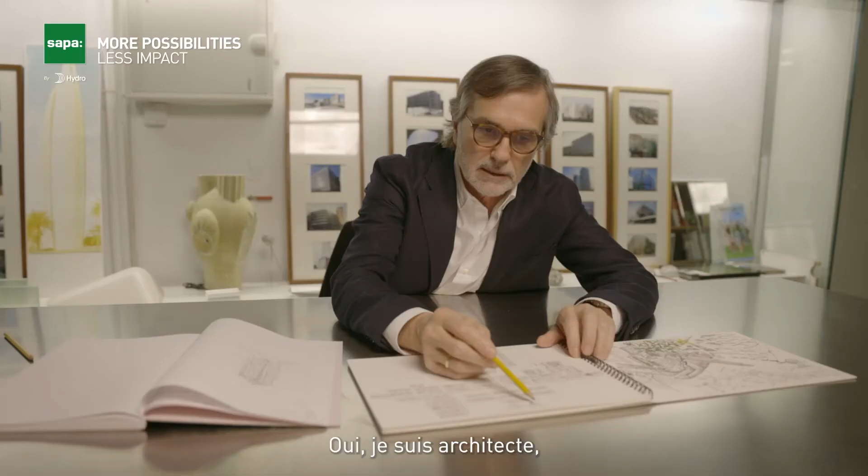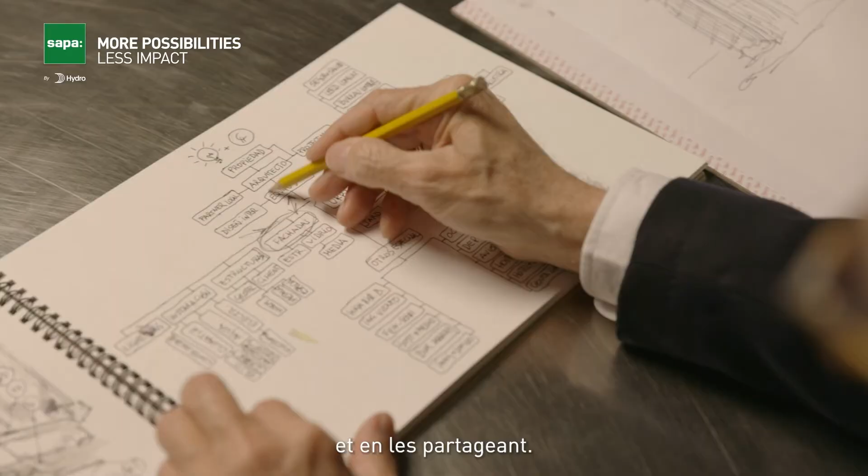First of all, I would like to introduce myself with a simple sentence. Yes, I'm an architect, but an architect with a special profile, because my team and I have developed more than 180 buildings over the last 30 years, making credible the ideas of others, sharing them by teaching in different universities, and especially through drawing.

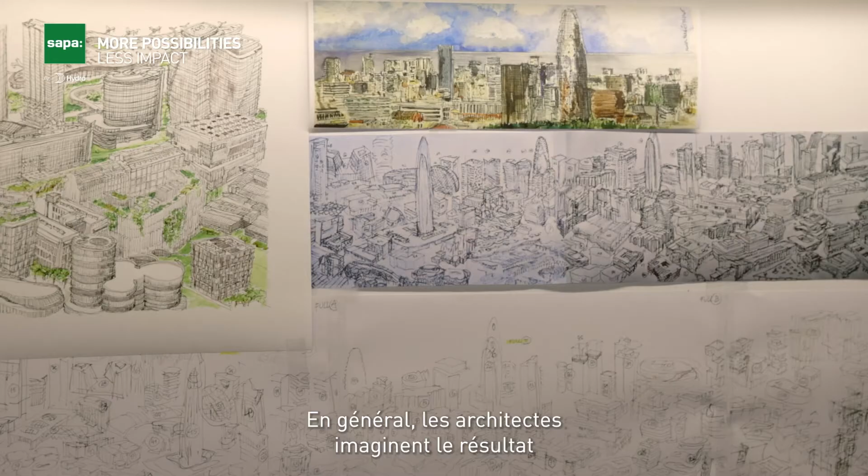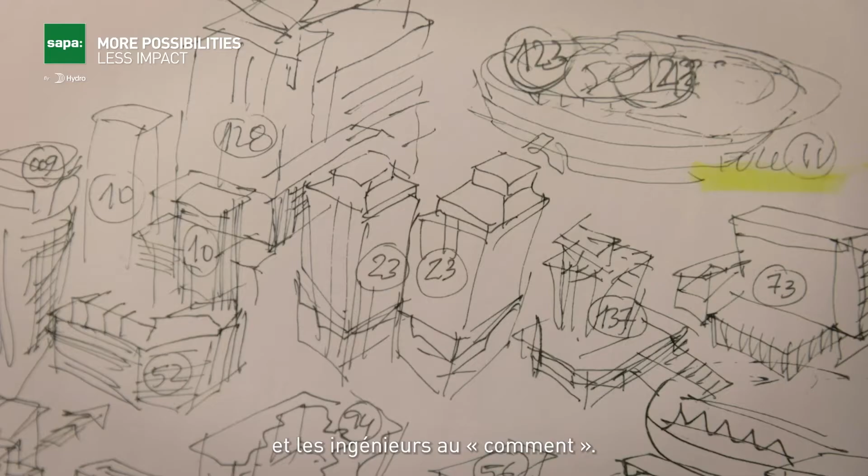We have a small and very dynamic office based in Barcelona, from where we offer facade consultancy for the best architects around the world, including Pritzker Prize winners. Usually, architects imagine the result and engineers create the process - or put another way, architects think what, and engineers know how. So we, as facade consultants, move in an equidistant position between both, and our projects are developed with a simple philosophy: technique and form are the same.

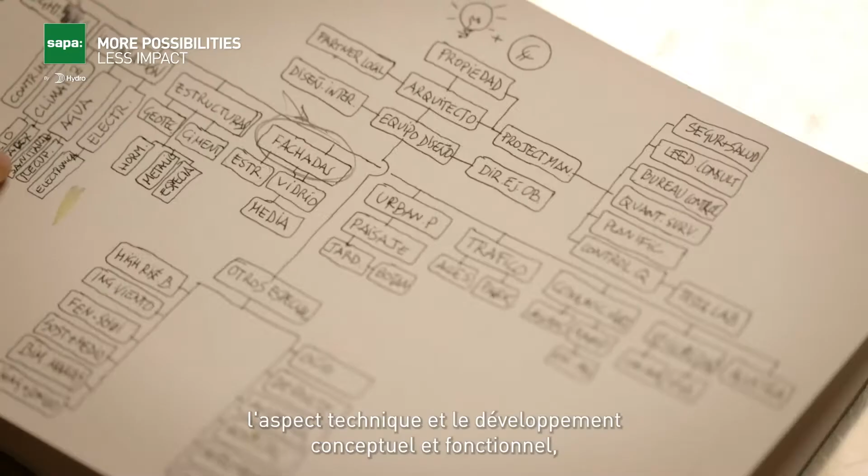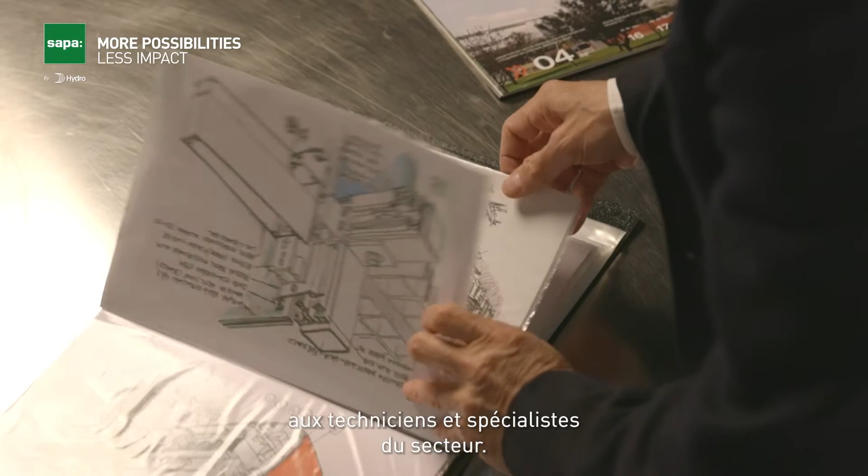Every day, more and more architecture studios focus their work on the level of definition of the facade, the technical aspect, and the conceptual and functional development, leaving the detailing and specific elements of the facade to be delegated to the technical specialists from the industry. So the most common way to face the problem of technology is to claim the support of brands that help us develop the most ambitious projects. Our role as consultant, in addition to this, is to think and advise from a strategic development perspective.

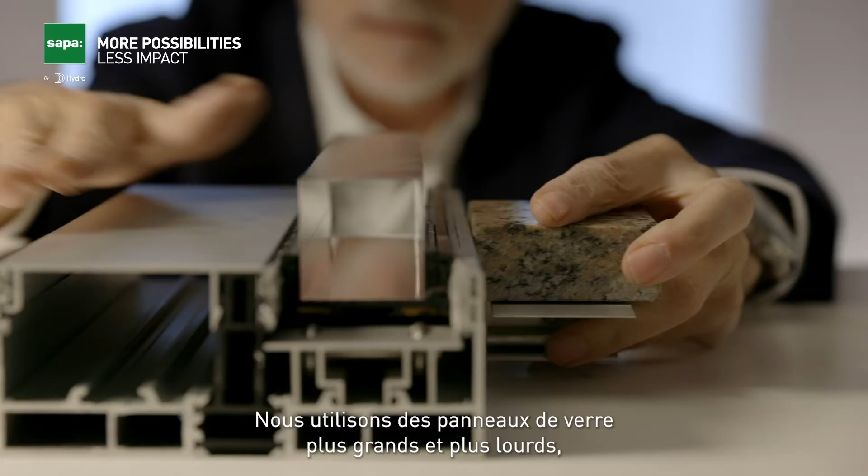The present leads us to consider energy as one of the engines of evolution, and this has been the case for decades. However, this contrasts with the need to work with large formats and glazed surfaces that push the so-called window-wall ratio higher - the energy performance of the facade is in contradiction with the dimension of the transparent areas of the buildings. On the other hand, this need to increase sizes requires larger profile dimensions, engineered for bigger and heavier glass panels by means of an innovative connection and reinforced glazing support.

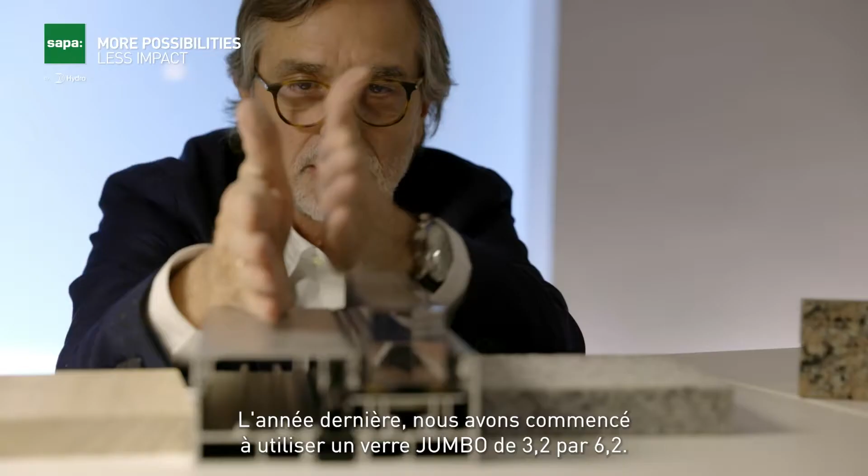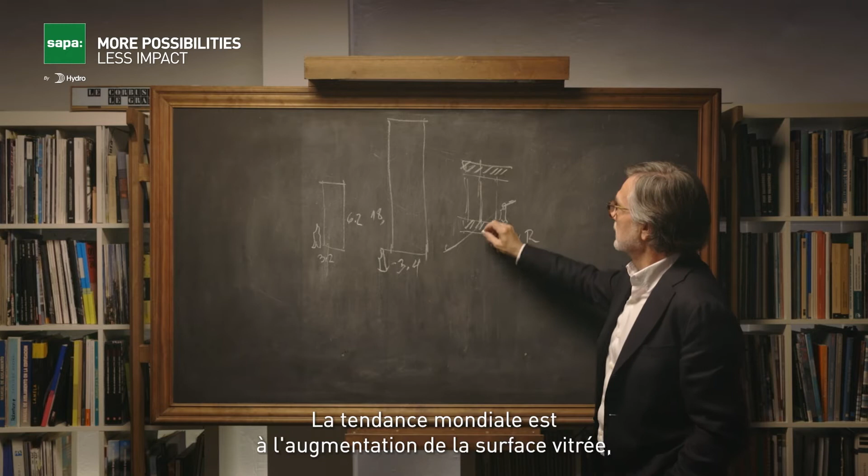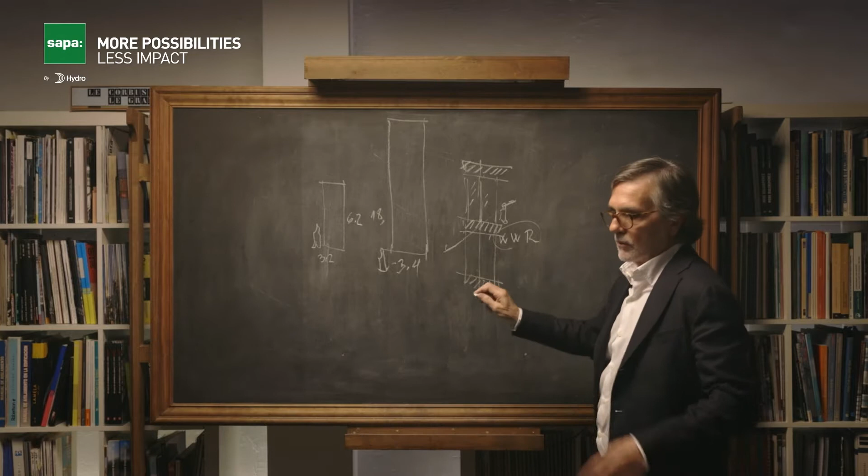Last year, we started with jumbo glass of 3.2 by 6.2 meters. Actually, with different suppliers, we now have glass panels up to 18 meters in height by 3.4 meters wide. So obviously we can use these sizes of glass. The trend of buildings around the world is to increase the glass surface, but balancing with the window-wall ratio, because we need to balance the comfort of users contacting directly, across the glass, with the landscape, the sea, the rest of the city, in order to respect the rules and regulations in terms of energy savings.

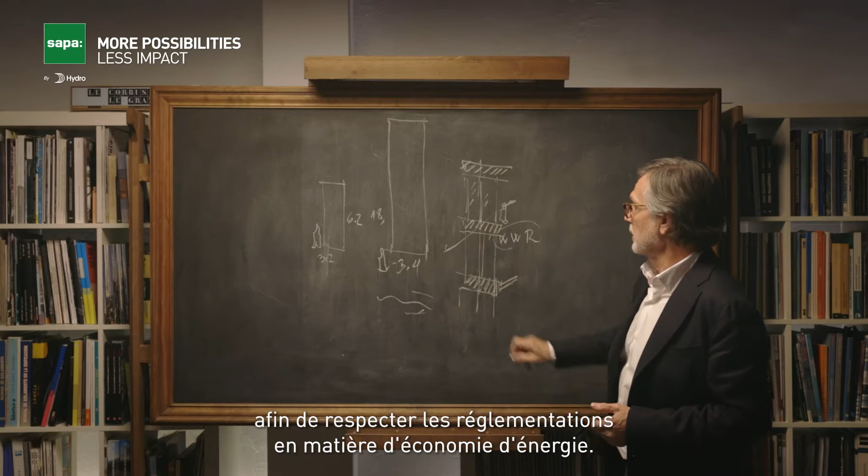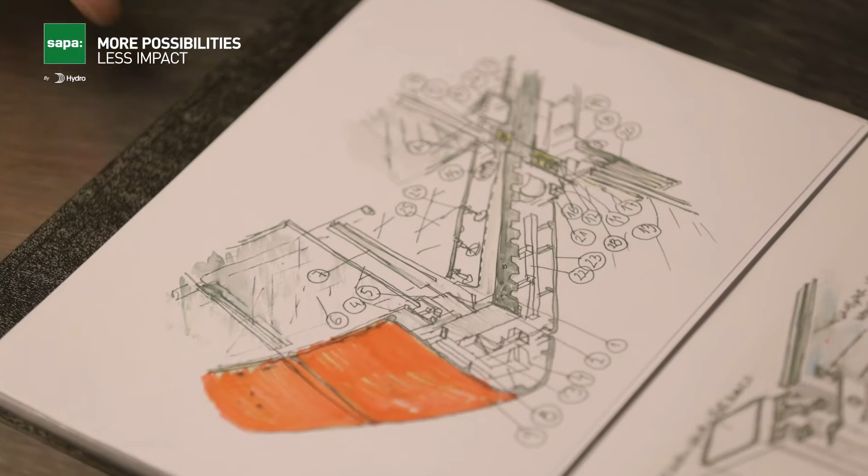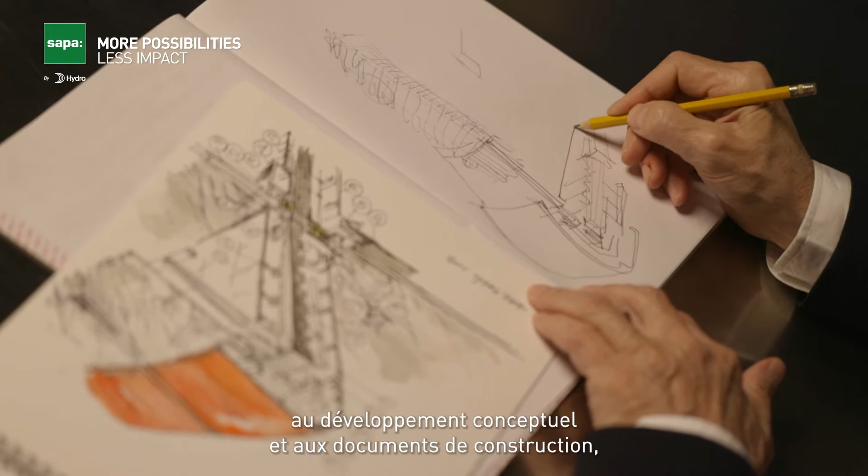The only way that I can explain my experience, my thought, my feeling about the technical decisions and technical elements is drawing. My brain is connected with my hand directly. When we are creating, we have to pass from the concept and schematic design development to the construction documents, trying to be proactive with the architects - normally our clients - in order to achieve maximal fidelity to the original idea.

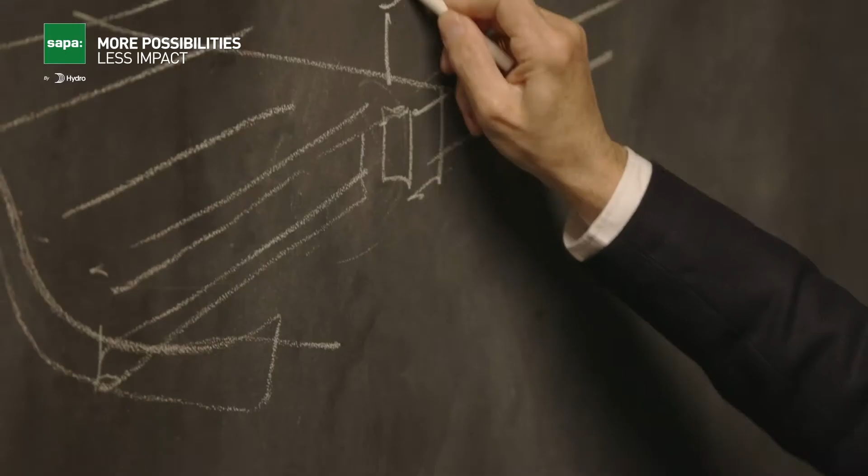For example, a building under construction in Barcelona, named Diagonal Zero, is a multi-story building - I think 27 levels - with a special balcony. This is the original slab, because it's a huge modification of the building. This is the slab, this is the beam that we have to support, this is the level of the interior floor, this is the exterior floor, and we have a shape like this.

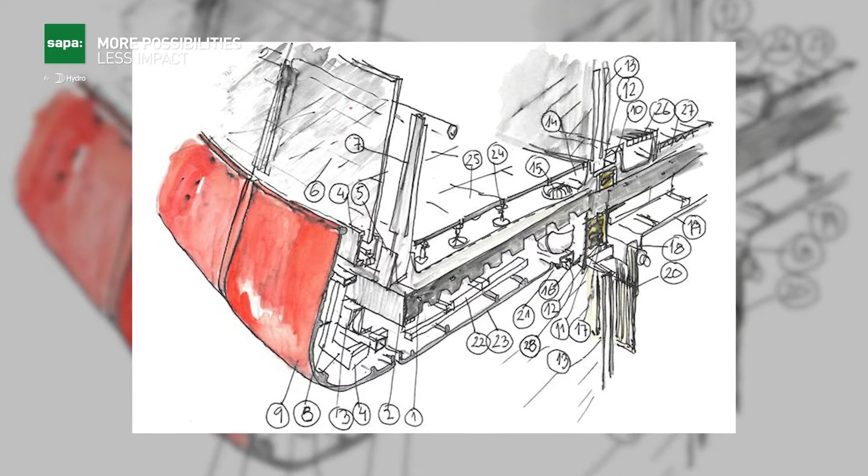This is a balcony, this is a terrace. The building is something like this. It's more or less 110 meters, and all these balconies are here. And here, in the lateral facade, we have a typical curtain wall.

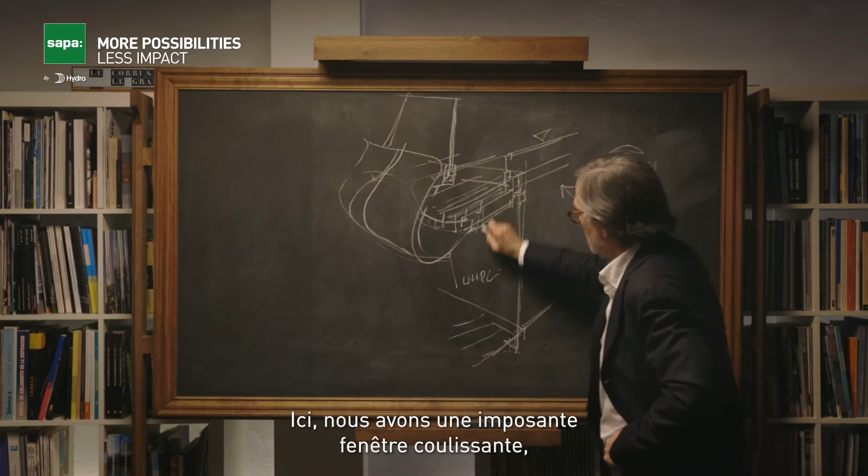It's a profile typical with spandrel and glass and windows, etc. The pass from here to here is very important to understand what happened. What is the slab? What is the structure? What is the weather line? In this case, with a sliding corridor, a sliding window, a huge, maybe 2.50 meter height. We'd like to show this in color, but I think it's clear in order to understand what happened when we have to develop from the concept to the detail.

The second case I'd like to share with you is a commercial and residential building in Ibiza, named Isla Blanca. The author is l'agence Moatti-Rivière de Paris. The project is led by Alain Moatti, and the local partner is Josep Ferrer Llaneras.

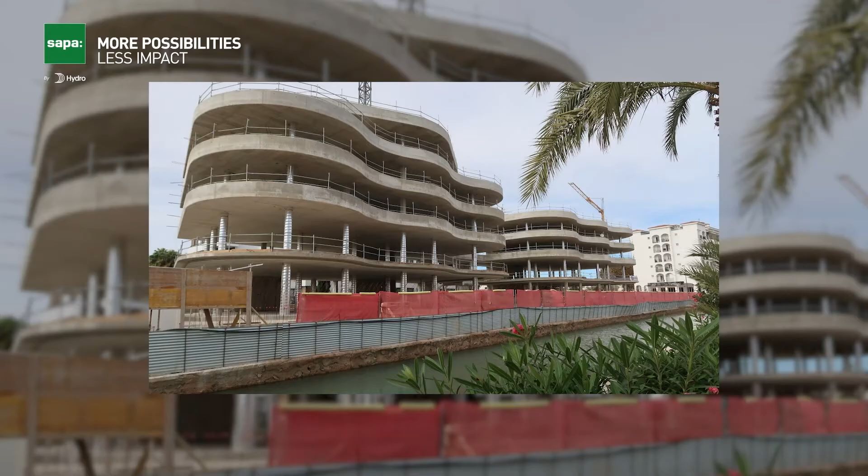The main concept is a shadow device named voilette in French. It's an element qui vole. So the building is double like this, maybe 80 meters of length from here to here, using this kind of material like a hat that produces the shadow under the face of a woman on the beach. And this element is something like this.

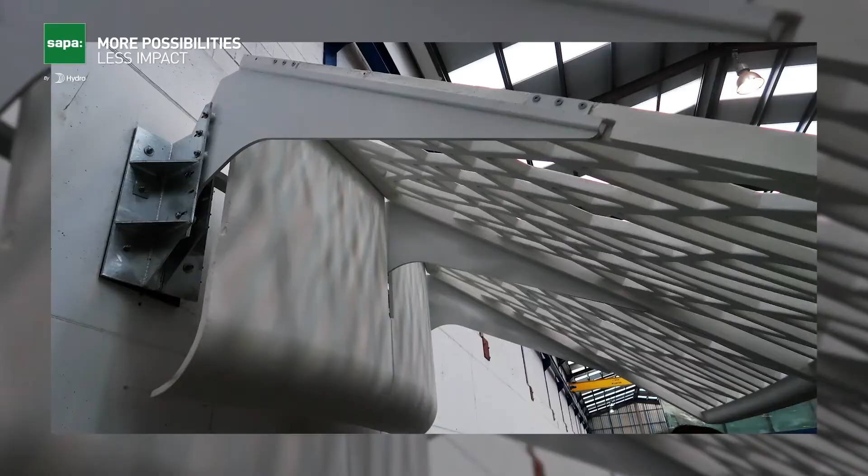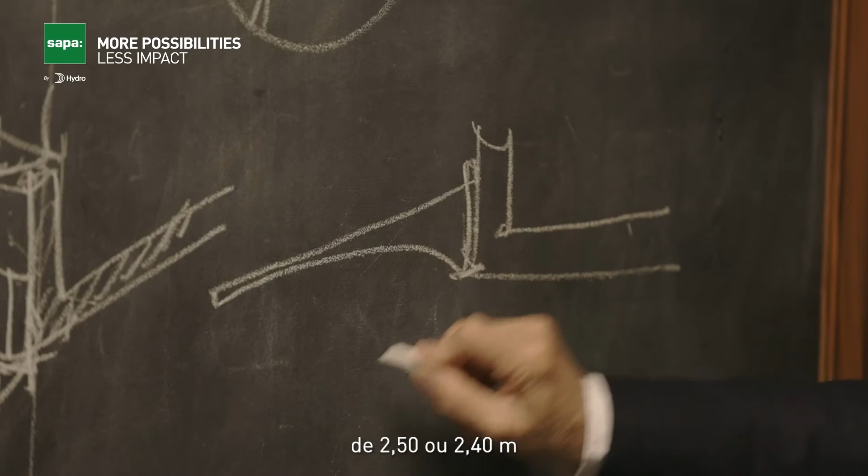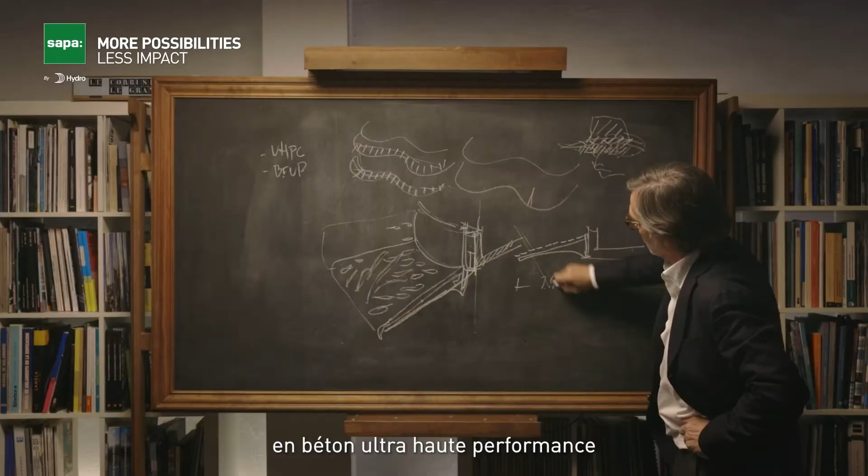There are different molds, because this is the main structure of the building, and here is hanged a huge element like this that supports these curves. So we have the structural element, this is a cantilever, more than 2.50 or 2.40, and this is the voilette in ultra-high performance concrete that allows it to work perfectly like a shadow device.

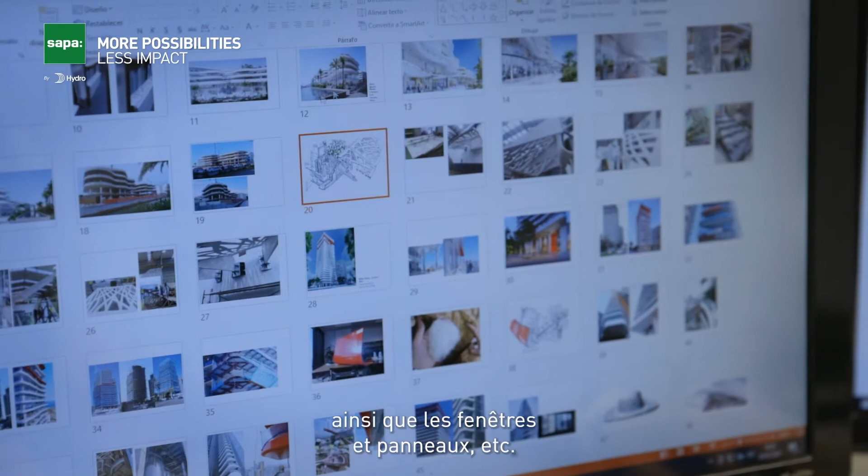So we have the vegetal elements here, and we have the windows, openables, etc. From here, we have as well another element here that is characteristic of this building.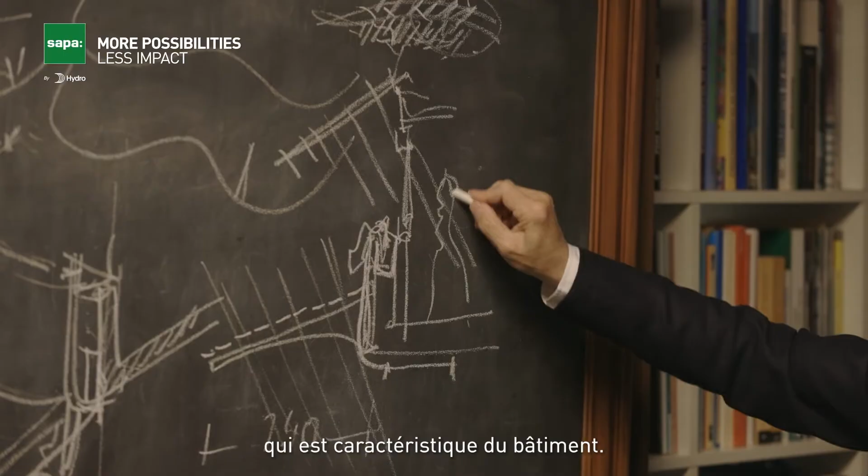The third case study is a multi-story hotel in L'Hospitalet, near Barcelona, in the Plaza Europa zone. It's a huge complex with a lot of buildings, hotels, office buildings, etc. This case is a project of Alonso y Balaguer.

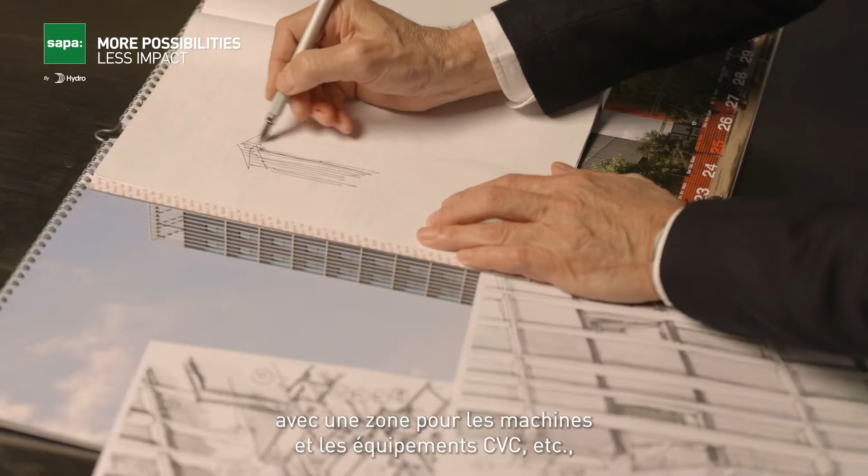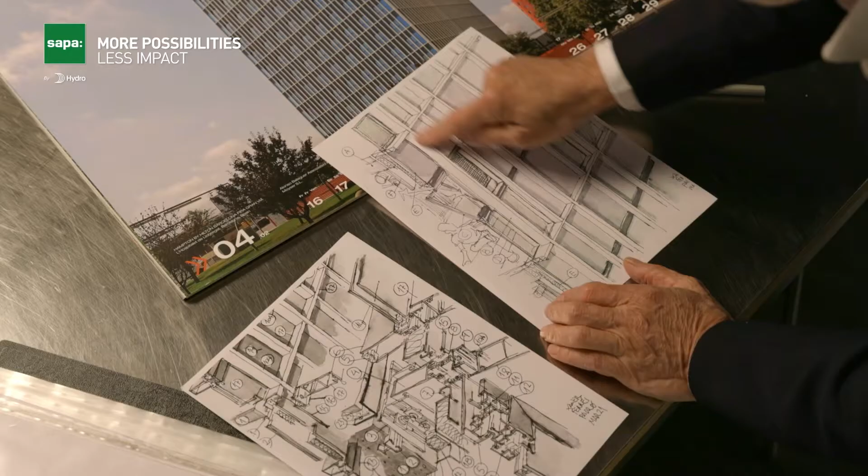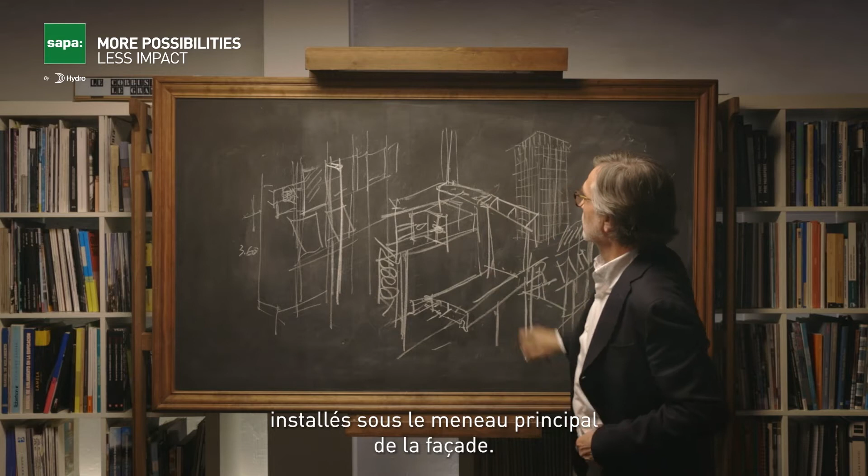It's the most common and typical curtain wall facade. The building is a parallelogram like this, with a typical zone with machines and the HVAC equipment, etc. The rest of the facade is a grid, absolutely regular, with the profiles that I will explain, because in terms of technology it's very simple, but the effect is really very interesting. So we have these two profiles, and they are clipped in the main mullion of the facade, and that's it.

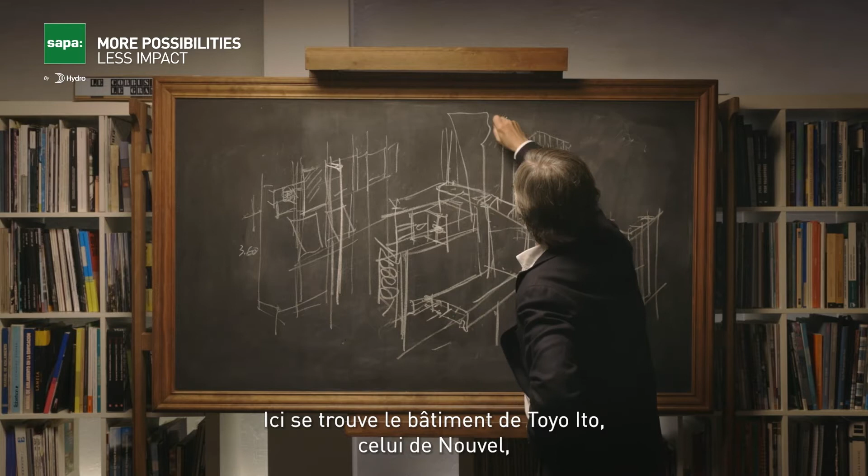So we have here the Toyo Ito building, the Nouvel building, RCR here as well, Moneo, and it is a very interesting complex that I invite you to visit, because if you are an architect passionate, I think that could be a good option to spend one day in order to know directly all this kind of different architecture.

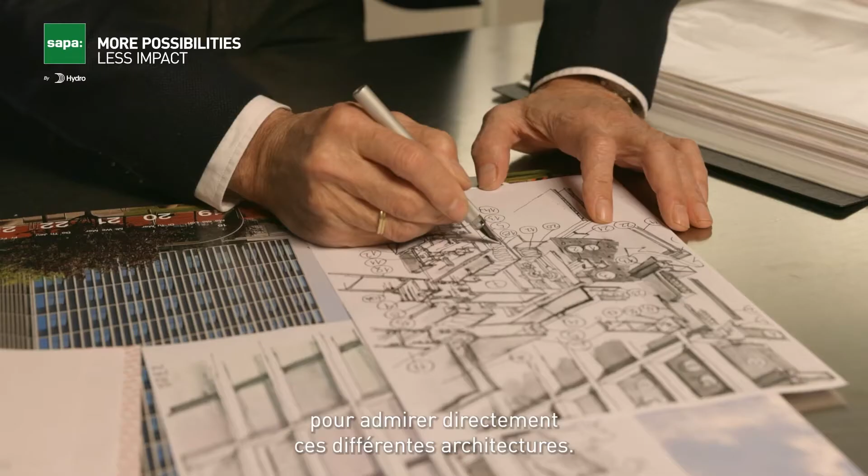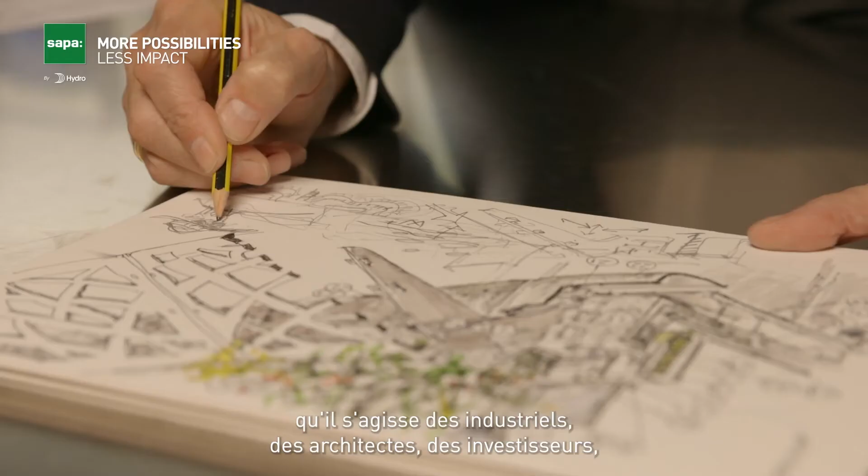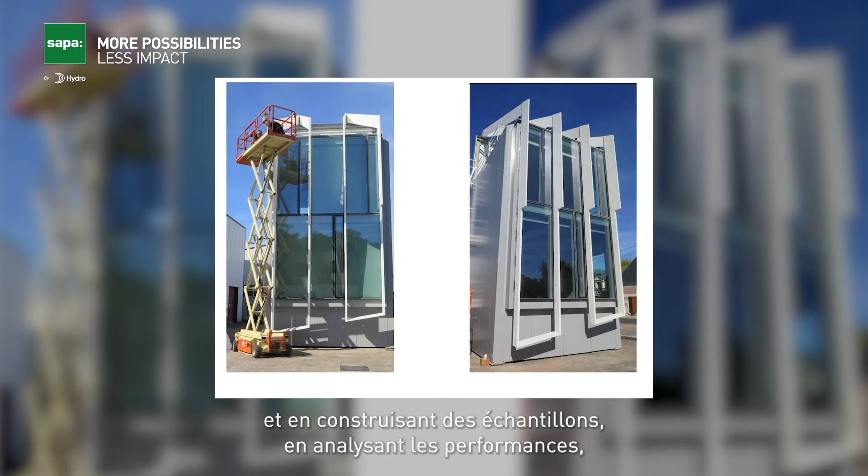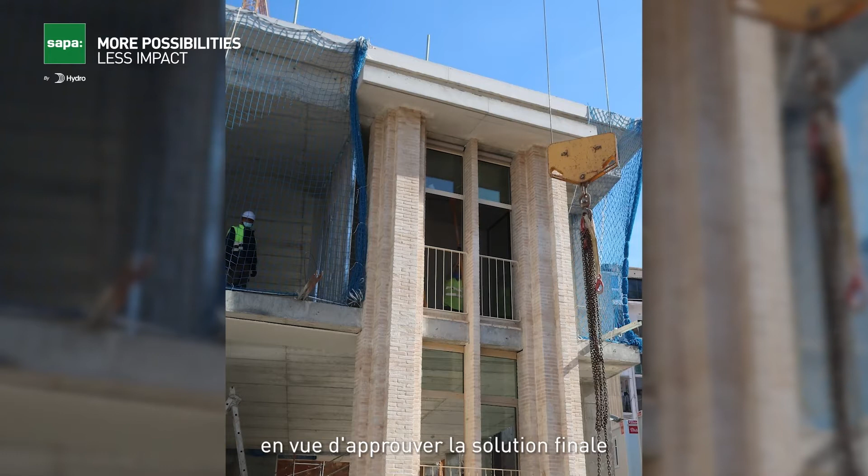As conclusion, I would like to share with you 5 thoughts as a summary. First, evolution that improves considering aspects from different points of view, like industry, architects, investors, owners, and consultants like us. Second, the extreme conditions of use are solved by anticipating problems and building samples, performance and visual mock-ups that are tested by the owners in terms to approve the final solution, in order to check the transparency, the vibration, all the aspects that we have to control by using prototypes and mock-ups in real size.

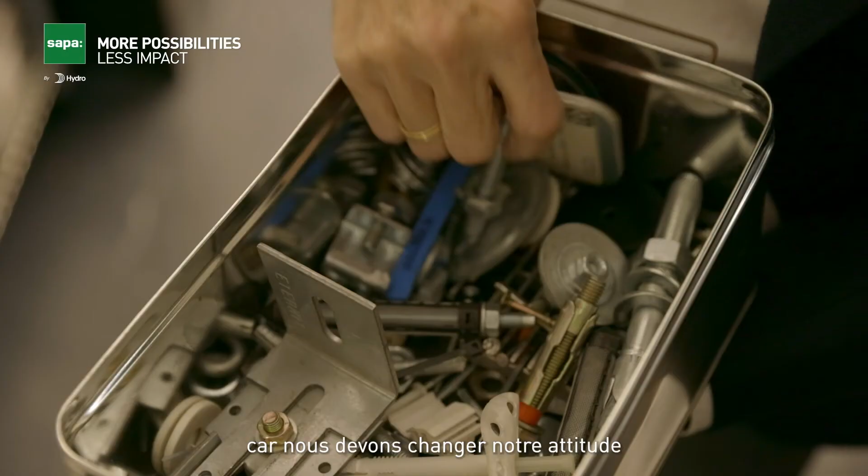Third, we have to look for collaboration with international brands that belong to a big and well-known group. It's the best option to guarantee a long experience of success. The fourth topic I think is important to sum up this explanation is to involve the clients and users in the project: planning, commissioning, exploitation, maintenance, live and recycling building as a way of working, because we have to change our attitude about the design and use of buildings.

And finally, we have to work from a global perspective. It's essential to combine the most diverse languages, cultures, rules and regulations, economic and social criteria with the most attractive architectural proposals. And for us, it's a privilege to be able to create a space for a better future.

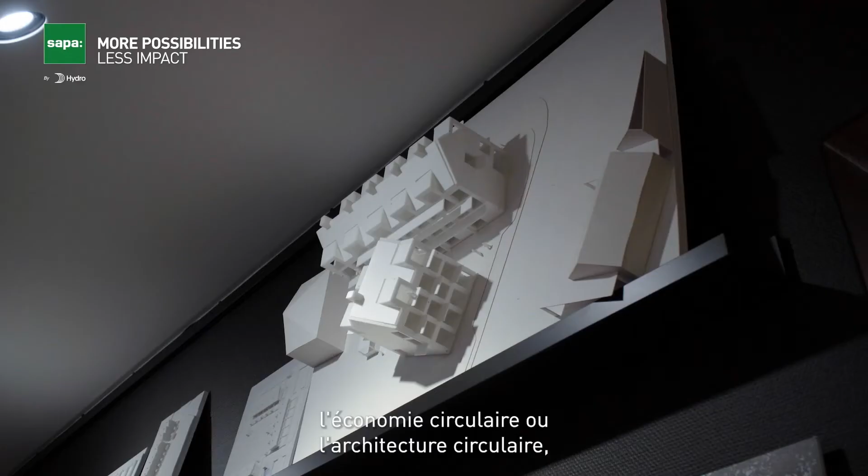The next one is circular economy or circular architecture. And then we work focused with biodiversity. On the social sustainability side, we work with safe environments, health and well-being, and then placemaking.

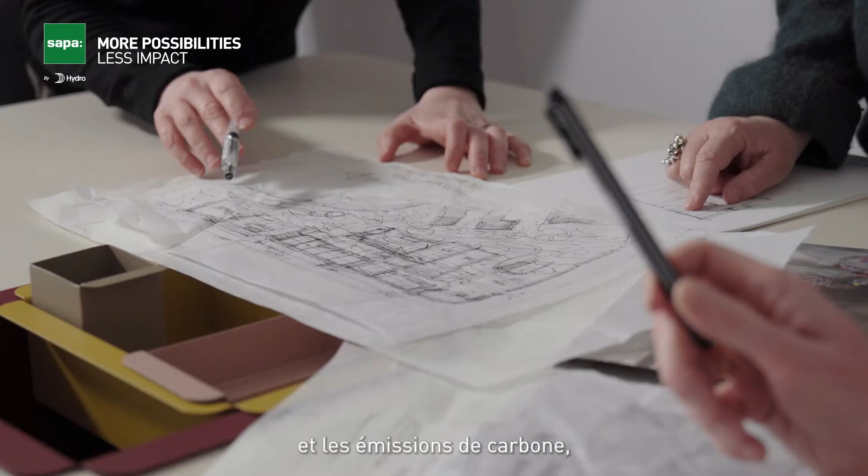So if we start with climate smart architecture or carbon emission as focus, we work very much on designing buildings with a low carbon emission or a carbon footprint. And that is both from operations when it comes to energy efficiency, but also when it comes to embodied carbon, which means the carbon that is emitted when producing the materials that goes into a building.

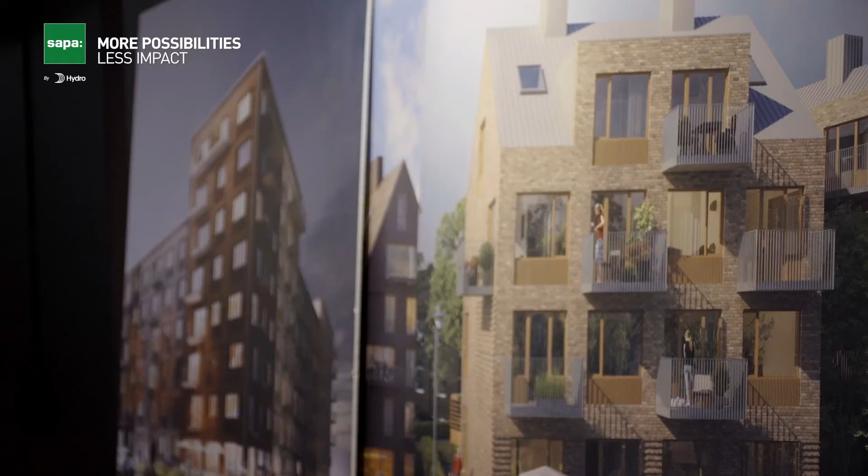If we then talk about circular economy and circular architecture, it's very much about designing resource efficient, securing that we don't use resources unnecessarily, but also about taking care of the buildings that are already built, so transforming or renovating buildings before we start looking for producing new buildings. It's also about reuse and recycle of materials, and also designing for circularity, preparing our buildings for a future that is more circular than it is today.

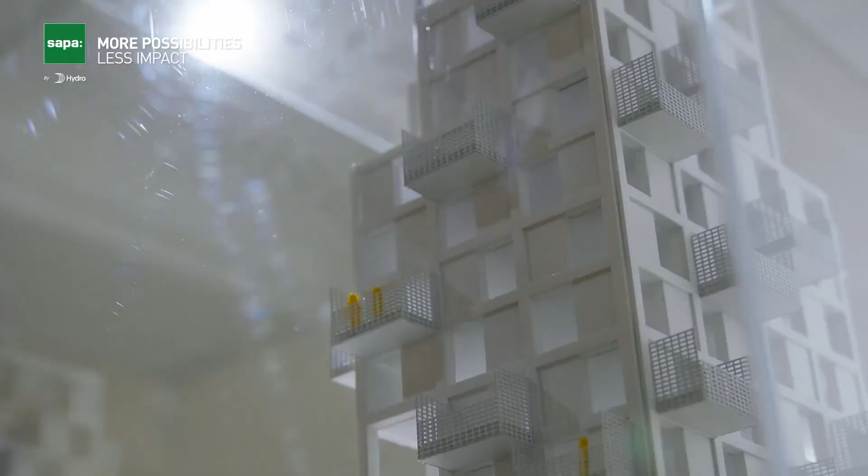And then we can talk a little bit about biodiversity. We know that the built environment, producing materials and constructing buildings have a great negative impact on biodiversity. So when working with the built environment, it's really important to look at biodiversity and see how we, when we construct our buildings, can choose materials that have a low impact on biodiversity, and also work with biodiversity when we create the built environments within the cities.

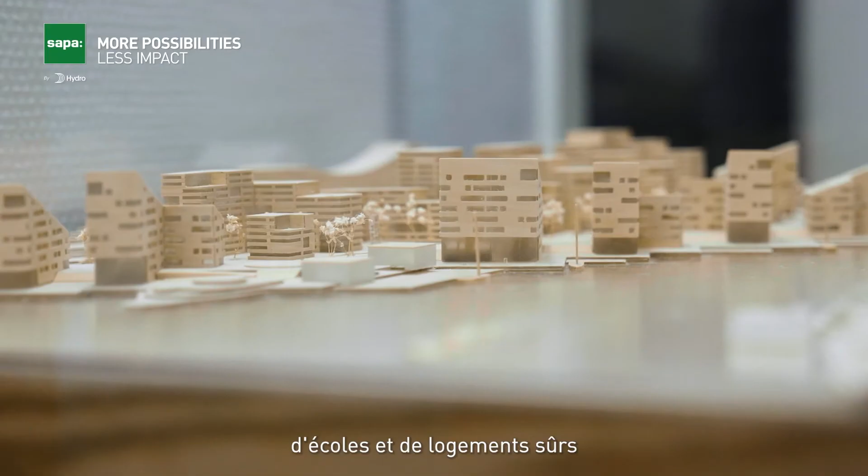If we then talk a little bit about the social sustainability that we work with, one of the areas are safe environments. We know that creating safety within, for example, residential areas, schools, housing, etc., creates people that feel safe and can take in, for example in schools, their education better. Not being safe at school can make students not come to school. So safety is a very important part of our contribution to social sustainability.

And then we can talk a little about health and well-being. That is an important part if you work with offices, hospitals, schools, also residential areas. If you can support a living that is healthy and supports well-being, then you can solve or contribute positively to some societal challenges. We know stress is an area, at least in the Western world, that is problematic, and different heart diseases and so on.

And then the last one is about placemaking, and that is both about safe environment but also about interesting environment, places where you want to stay, places where diverse people can come and meet, and you can feel the inclusiveness because you want to stay there, you want to meet other people.

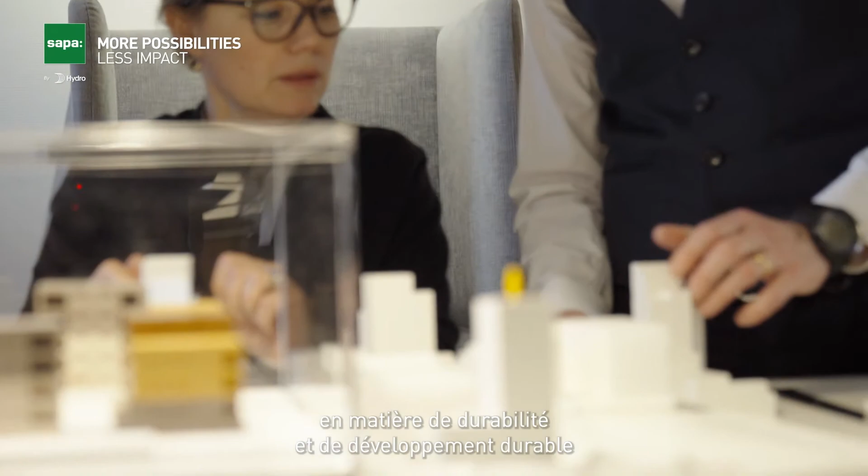When it comes to the architect's role in relation to sustainability and sustainable development, we play an important role because we usually get in pretty early in the processes and the project development. And thereby we can be part of setting a vision that fully integrates sustainability so that it can be a base for decision made during the design and also during the construction phase.

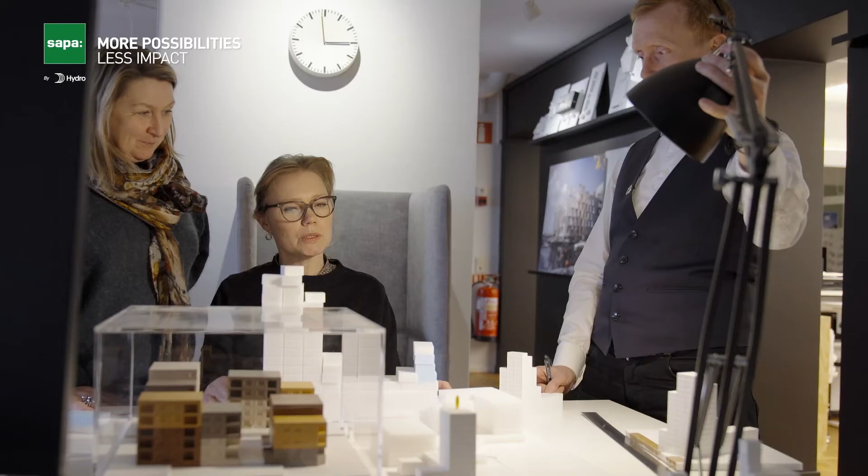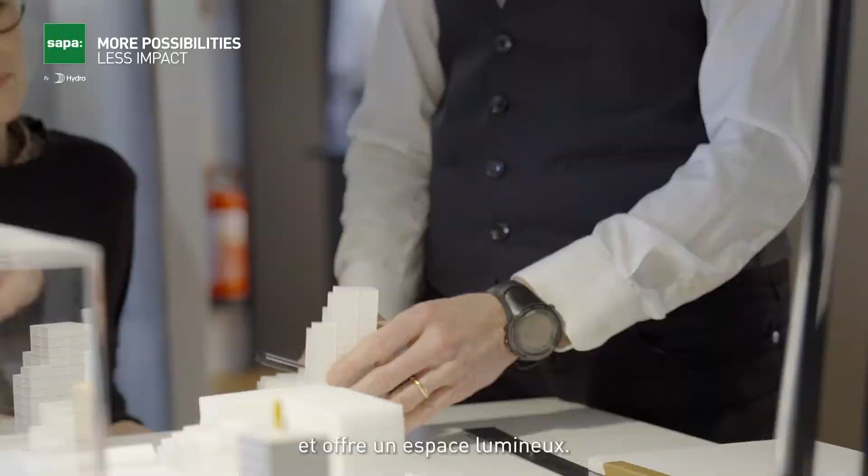And then we also play a very important role when it comes to the actual design. So through the design we can work with, for example, indoor environment when it comes to designing so that daylight comes into the building, that you have a good view of the scenery, and also working with designing so that we minimize the negative impact of the built environment in relation to resource usage or carbon emission and stuff like that.

And then when we come to looking at choices that we make, for example in relation to materials, we have a great possibility to influence the final positive impact in relation to sustainability by choosing materials that we know can lower, for example, the carbon emission, the carbon footprint of the building, or adding to some qualities in relation to indoor environment.

Well, if we talk about materials, we know that the construction industry and producing materials have a great negative impact on the environment. It's everything from polluting the air and the water. It's about using virgin resources that are rare or scarce or limited. So we have to make sure that we don't use them too much, because then we'll run out of them.

It's also about, we know for example, that 80% of all drinking water goes into producing different materials. We know that 80% of the loss of biodiversity is coming from producing materials, foods, etc. So it's a very important part when choosing materials that we look upon materials not only from a cost perspective and a quality perspective, but also from a sustainability perspective, and always try to find the materials that give us the most bang for the buck, the most positive impact in relation to the investment that we do.

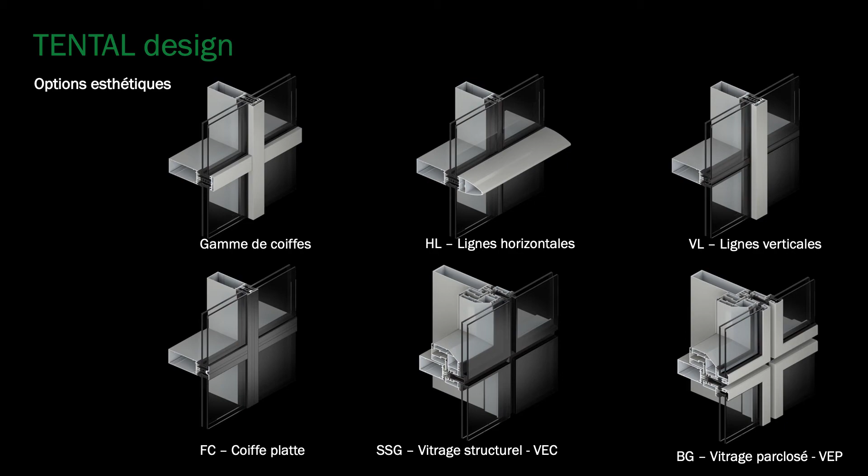Nous avons un système traditionnel avec un collage structurel en silicone, et nous avons également un système avec des parcloses pour un effet de bord épuré de l'extérieur. La gamme de base des coiffes de protection est disponible dans un certain nombre de conceptions et de tailles différentes.

Tous les profilés peuvent être laqués, anodisés ou finis avec un effet bois. Le produit peut être joint pour créer différentes géométries, facettes, angles et applications de vitrage incliné, et il est applicable aux structures en bois et en acier.

Le troisième pilier est le confort. En tant qu'être humain, nous passons la plupart de notre vie à l'intérieur. Nous voulions donc nous assurer que nous fournissons un haut niveau de confort physique et mental aux résidents derrière la façade. La façade Tental est conçue pour accueillir de très grandes baies vitrées permettant une pénétration de lumière naturelle plus importante dans le bâtiment.

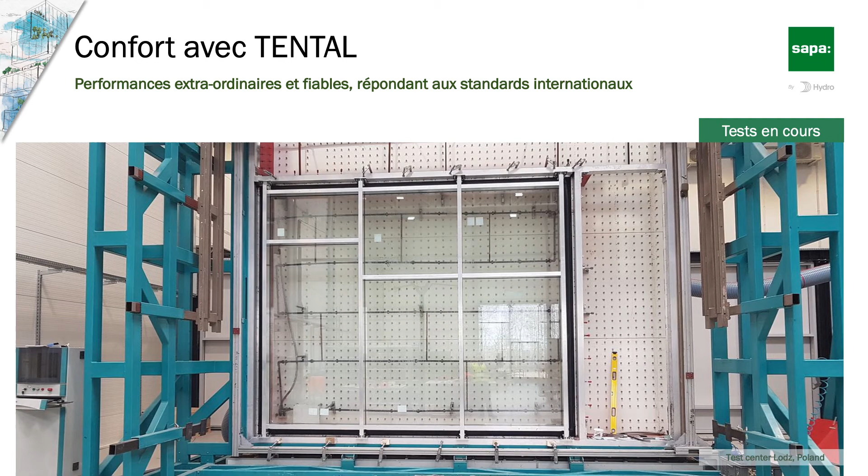Le produit a été rigoureusement testé contre les intempéries, conformément aux normes internationales, pour garantir d'excellentes performances et une excellente étanchéité. En plus des influences météorologiques, nous proposons également des solutions qui garantissent la résistance au feu et à l'effraction.

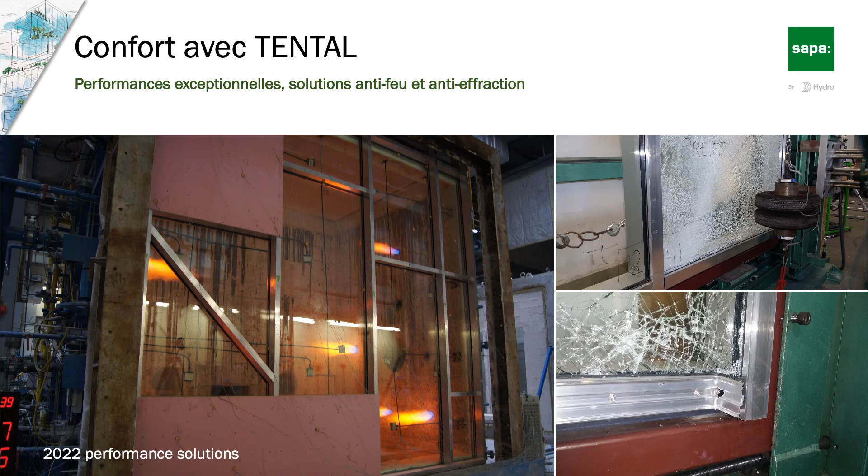La façade Tental atteindra d'excellentes performances thermiques et sera certifiée par le Passive House Institute. Elle sera également testée acoustiquement pour la transmission du son à travers la façade, d'étage à étage et de pièce à pièce.

La façade Tental comprendra un certain nombre d'options de montage externe différentes qui permettent une intégration transparente de la protection solaire, et sera entièrement compatible avec la nouvelle génération de fenêtres, de portes et de coulissants de la marque SAPA. Le quatrième pilier important est la durabilité, la circularité.

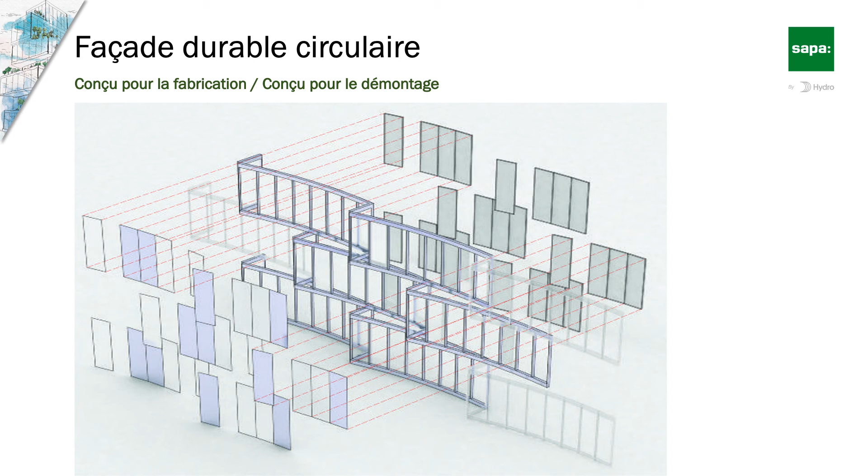Ainsi, lors du développement de Tental, nous nous sommes concentrés non seulement sur le présent, mais aussi sur l'avenir. Dans le développement du produit, nous nous sommes concentrés sur la production, l'assemblage, l'installation pour nous assurer qu'il est pratique, simple et efficace pour notre client, et nous nous sommes également concentrés sur le démontage lorsque le produit est en fin de cycle de vie.

Cela revient au principe de ne pas utiliser d'adhésif ni de mastic, car cela signifie que les pièces de la façade, l'aluminium, les connexions, les coupures thermiques, peuvent être facilement séparées afin que toutes les pièces puissent être recyclées simplement. La façade Tental est extrudée avec de l'aluminium Hydro Circal 75R, consistant en un recyclage d'au moins 75% d'aluminium usagé.

L'impact de cela sur la façade est important car l'aluminium, en fonction de l'ouverture de la fenêtre de la façade, peut représenter jusqu'à 90% du volume de matériaux. Cela signifie donc que l'énergie nécessaire à la production de la façade Tental aura l'empreinte CO2 la plus faible du marché, confirmée par une déclaration environnementale du produit, ou EPD.

En plus de l'aluminium, nous avons été responsables de la sélection d'autres matériaux utilisés dans la façade, tels que les coupures thermiques en XPET recyclées provenant de bouteilles de boissons en plastique.

La façade Tental sera certifiée Cradle to Cradle. Le programme de certification Cradle to Cradle est une référence mondialement reconnue non seulement pour le produit, mais aussi pour la durabilité. L'évaluation de la façade Tental est en cours, avec notre attente d'obtenir une certification argent.